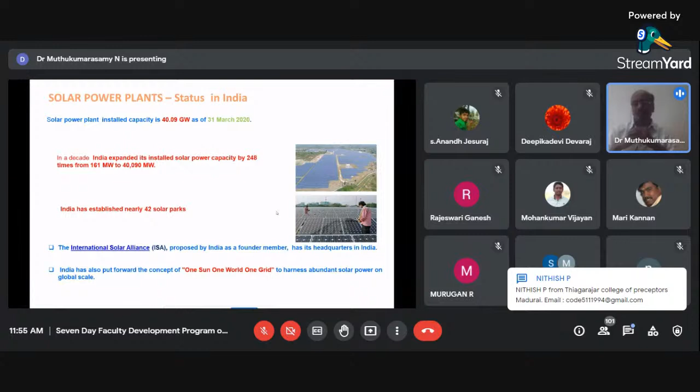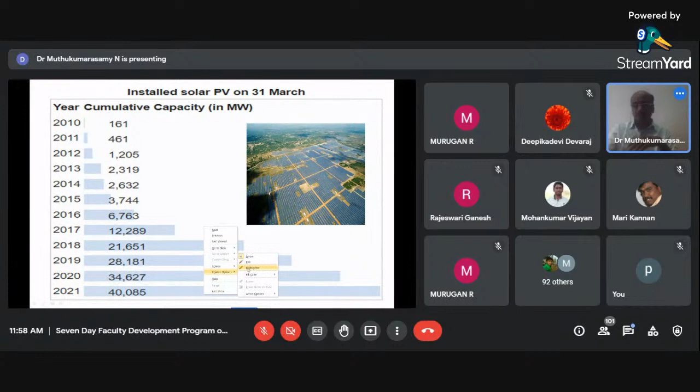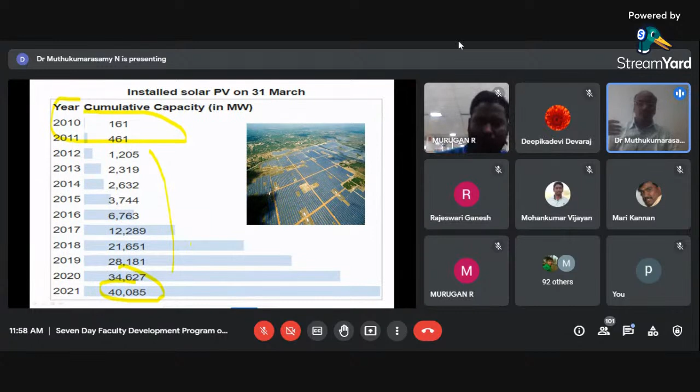And installed solar PV capacity as of 31st March 2021, as I told, is 40,085 megawatt, which means 40 gigawatt. You can see we started in the year 2010. 10 years back, it was only 161 megawatt. Now you can see how much we have improved, and the rate at which it has increased. So now we are standing at 40,085 megawatt, as on 31st March 2021.

After that, many industry people started to enter into solar utilization. They went for massive purchase of lands and laying of solar panels. And many industries have 3 megawatt, 4 megawatt, 10 megawatt solar power plants installed all over Tamil Nadu. So that's why we are in the third or fourth position, because Gujarat as well as Telangana are very closely following us. As of March 2021, Tamil Nadu is producing 4.4 gigawatt of solar power.

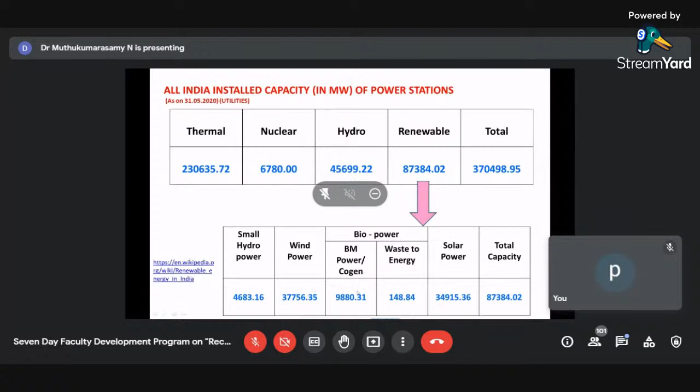Now it is 40 gigawatt. That is our solar power. And you can see small hydro means less than 100 megawatt. Then you have wind power, 37. Then cogen means cogeneration, where they are using it for heat as well as light, 9880, all those things.

Okay. Now, what is the target which India has set? I told you that India has set a target that they want to reach 20 gigawatt in 2022, but they achieved the target 4 years ahead of the schedule, and in 2018 itself they reached 20 gigawatt. Now they have fixed a target of 100 gigawatt by 2022, but it is a highly ambitious target. We do not know whether we'll be able to reach 100 gigawatt in 2022.

Because now we are in 2021, and as per this target, we should have reached 82, but we are halfway only, we have reached only 40 gigawatt. So maybe we may reach 60 gigawatt or 70 gigawatt by the year 2022. But anyway, they have gone for a highly ambitious target. They want to go for 100 gigawatt as of 2022.

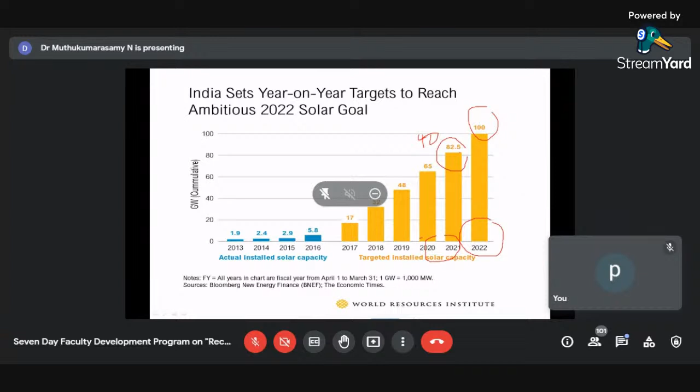So you can see the cost of solar power has come down drastically from 17 rupees per unit in the year 2010 to 2.44 rupees in the year 2017-18, and this has made more people move towards solar panels. They have started to install solar panels in their home, in their industry, and they have started to utilize the electricity which they get from solar panels. So this was a misconception which was there earlier. Now this also has been broken, and now the cost which you have to spend has become very, very less.

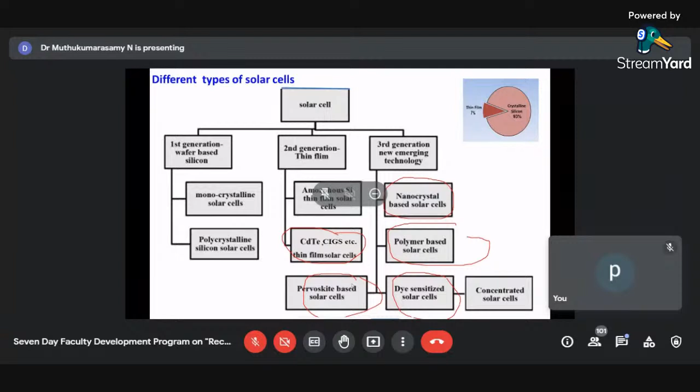So we are going to see perovskite based solar cells, which are emerging technologies in the category called third generation solar cells. Why are many people working on them? Any person working in solar materials research will try to work with perovskite solar cells. You can see here the perovskite solar cell. It started only after 2013. During that time the stability and efficiency were very low, only nearly 10%, 11%, 12%.

Now this is in 2020. They have reached more than 25% efficiency, an efficiency comparable to that of silicon solar cells. So within a short span of time, from 2013 to 2020, they have reached this efficiency.

But take the crystalline silicon solar cell: it started in the 1970s, and only after 1995 or so did it reach this efficiency. It took more than 25 years to come to an efficiency of 20%. Whereas perovskite solar cells, within 7 to 8 years, were able to give an efficiency comparable to silicon solar cells. That is the main advantage of perovskite solar cells, and that's why people have started to move towards them.

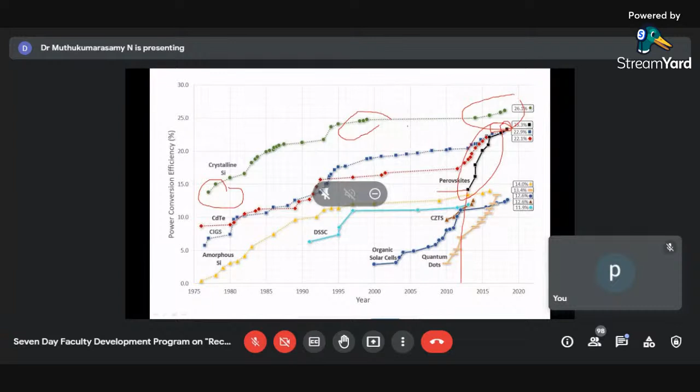Another important thing: that is lab scale efficiency, not commercial efficiency. Please keep it in mind. And another thing is, it has not been tested under all conditions as tested for silicon solar cells. Silicon solar cells have been tested under all conditions, under different temperature gradients, different irradiation gradients. But perovskite solar cells and other new entries have not been tested under all conditions.

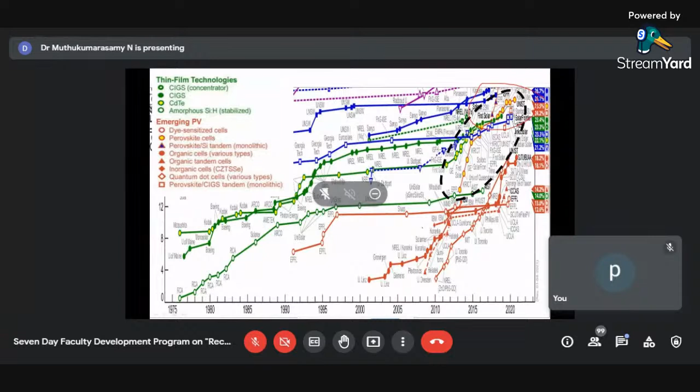So this is nothing but a magnified version. You can see it has come to a level of 25, which is comparable to the efficiency exhibited by silicon solar cells. So it has come to this particular level. That's why people have started to move towards perovskite solar cells. And you can see how the efficiency has increased from 2009. It was only 3.8%.

Efficiency is nothing but the solar power which you give and the amount of electricity which you get. Amount of electricity produced divided by the solar input. How much solar has been converted to electricity? That is what we call efficiency. In 2009, it was only 3.8%. By 2016 it had crossed 22%. Now it is 25.5% in 2020.

And the number of research publications, because many people started to work with perovskite solar cells. Per year, you can see in 2014 nobody was working with perovskite solar cells. Some people were interested in crystal growth of perovskite. But after 2017, the number of research publications per year on ordinary perovskite solar cells, this blue color, is more than 2,000. And in 2019 it was at maximum, nearly 4,000 publications per year.

All these are Scopus indexed publications. Please keep it in mind. They are not ordinary publications. More than 3,000 publications are coming out per year, particularly in perovskite solar cells. And you have two-dimensional and three-dimensional perovskite solar cells.

Another important thing I want to tell you: if somebody is interested in working with perovskite material, if you can grow large perovskite single crystals, you can also use them for another application, particularly X-ray and gamma ray radiation detection. They are very good detecting materials, particularly for X-rays as well as gamma rays. So there also they have started to use perovskite materials.

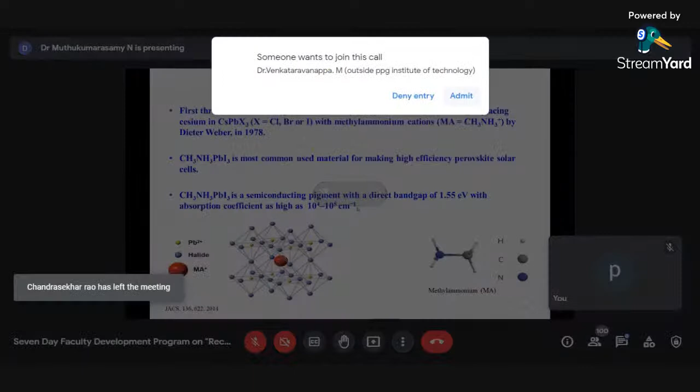You can see that in the diagram on the left hand side, with lead occupying the center, and in the center diagram, the octahedra formed by the halide ions. Initially people were working only with cesium lead iodide and cesium lead chloride. Then they went for an organic-inorganic hybrid perovskite, introduced by Dieter Weber in 1978, where cesium was replaced by methyl ammonium. So it was methyl ammonium lead iodide or lead chloride.

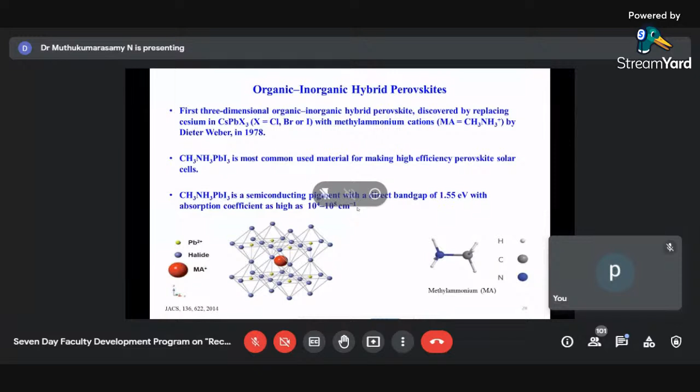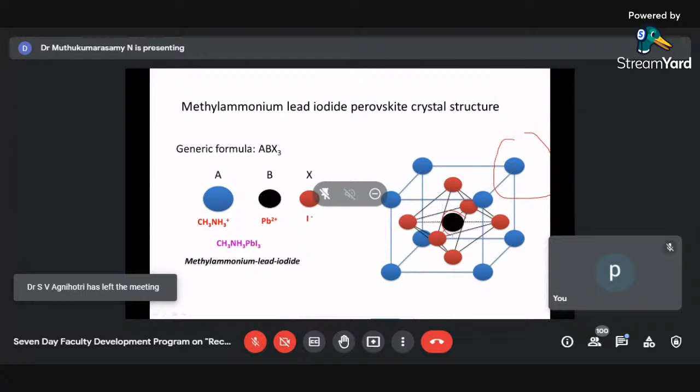Methyl ammonium lead iodide is the most suitable material for the fabrication of solar cells. In this type of solar cell, it is used as an absorber material, which absorbs the incident solar radiation and converts it into electricity. It has a band gap of 1.55 and an absorption coefficient as high as 10^4 to 10^5 cm^-1. As I told you earlier, in the methyl ammonium lead iodide perovskite, methyl ammonium ions occupy the corner positions, the chloride or iodide halogen ions occupy the face centers, and lead occupies the body center position.

And another important thing is there is also what you call by the name phase change, where you know that you must have studied the crystal structure, where transition from one to another can happen, and also your corner atoms may be moving, because all these things depend upon how you're going to construct your crystal structure or unit cell.

And another important thing is this methylammonium lead iodide exhibits 3 different crystal structures. Greater than 327.4 Kelvin, it will be cubic. In the temperature range 162 to 327.4, that is in the room temperature range, it will be tetragonal, where we are using it as a solar cell material. And if you go for a temperature less than 160, it will go for an orthorhombic type of structure. So it exhibits 3 different structures: cubic above 327, tetragonal in the range of 162 to 327, and below 160 orthorhombic.

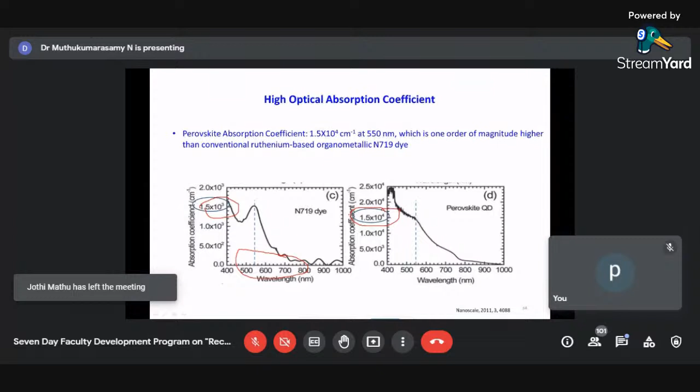Now coming to the main area, if people are interested in working with perovskite materials, then you could start working with methyl ammonium lead iodide. That was the material which we started to work on nearly 6-7 years back. So methyl ammonium lead X3, we can have iodide or chloride or whatever it be. You can change the band gap, because band gap tuning will make your material absorb light as per the wavelength. So you can extend the wavelength of light which you want to absorb by tuning the band gap.

People who are working with solar cell materials know that if you have a band gap in the region of 1.4, 1.5 electron volt, particularly the one that matches with cadmium telluride and copper indium gallium selenide, that is considered to be a very good solar cell material because it will absorb the entire visible wavelength region. But silicon solar cell has that particular drawback because its band gap is only 1.1, and again it is an indirect band gap material.

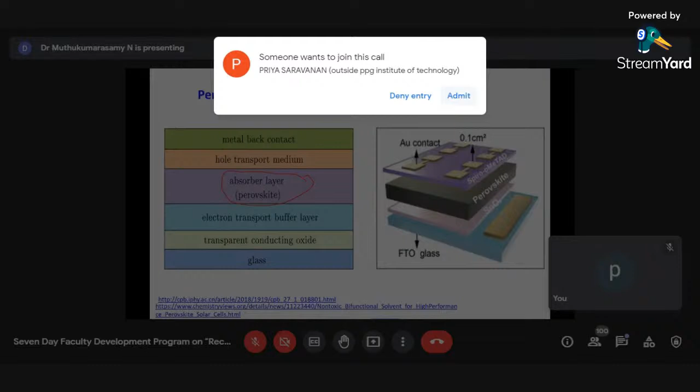So as I told you, the perovskite solar cell architecture is completely different from your silicon solar cell architecture. You have different layers in your perovskite solar cell, and the main layer is your absorber layer, which is made up of a perovskite material, which is going to absorb your sunlight. As soon as it absorbs the sunlight, it is going to produce electrons and holes. So holes will be scavenged or attracted into your hole transporting material, and electrons will be moved into your electron transporting material.

So electron hole pairs have to be generated, what you call by the name exciton, where you have your electron in the conduction band and hole in the valence band. The hole moves into the hole transporting material and the electron moves into the electron transporting material. Then that electron has to enter into the transparent conducting oxide, and generally they go for fluorine doped tin oxide. So fluorine doped tin oxide coated glass plates are used as substrates, and over that you have your electron transport material, and the most commonly used electron transport material is titanium dioxide.

Then for the hole transport material, generally they were using organic materials, which I'm going to tell you about later, or they go for nickel oxide, and now people have started to work with carbon based materials as hole transporting material, and the last one will be your metal contact.

So the structure is not a simple structure. You have to grow different layers. That is very, very important. So you can see the right hand side diagram, which shows how a perovskite solar cell will look like. For clarity's sake, I have shown the layers well separated, but those layers will be lying one above the other, having a very good contact with one another.

So you have an FTO glass. Either people can go for ITO glass or FTO glass, but people who are working with dye-sensitized solar cells or perovskite solar cells better start with FTO glass, that is fluorine doped tin oxide glass, because with ITO glass, when you anneal it to temperatures of 300, 400, etc., stability issues will be there. So better to stick to fluorine doped tin oxide glasses.

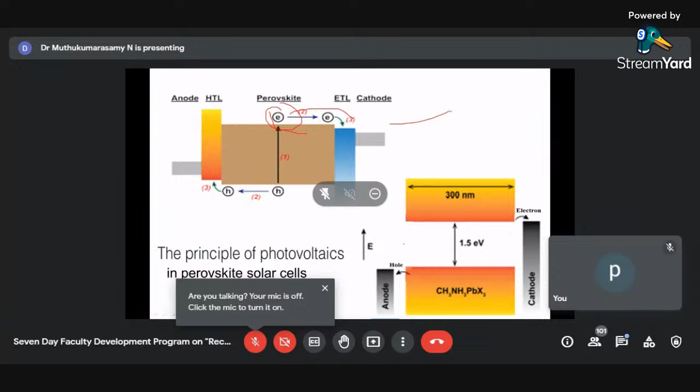But what is the reason that the efficiency is less? You have many energy losses which take place. That is, the electron which is being excited into the conduction band of the perovskite material has to move into the conduction band of TiO2. If that doesn't happen, if that electron, for example, reverts back to the valence band, then that is a loss. Or if that electron, after moving to the conduction band of titanium dioxide, comes back into the valence band of your methylammonium iodide or comes back into the spiro, then that again is a loss. That electron after TiO2 has to move to the other counter electrode.

If that doesn't happen, then that will be a loss. Or if an electron from the conduction band returns back to the spiro. So all these are energy losses. The electron which is being excited and put into the conduction band of your perovskite material should enter into titanium dioxide, then to the counter electrode. It should not come back. If that happens, then those are the things which are responsible for the energy losses which take place in perovskite solar cells.

Now coming to the evolution of perovskite solar cells, how all these things started, you can see perovskite solar cells started only from dye-sensitized solar cells. People who are working with dye-sensitized solar cells know that in dye-sensitized solar cells, you will be having a photoelectrode. It may be titanium dioxide or zinc oxide, particularly titanium dioxide. And this titanium dioxide is soaked with a dye material, particularly a material which can absorb your visible light, particularly ruthenium-based material. So titanium dioxide is sensitized by using ruthenium, and that forms your one electrode.

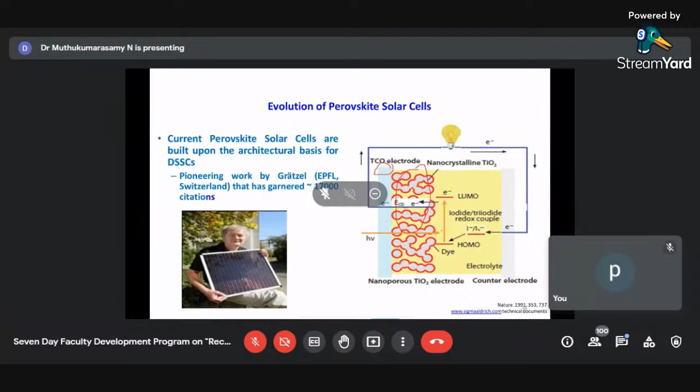And the electron which the dye has lost comes from the electrolyte here, and it may be a polysulfide electrolyte or iodide, triiodide type of redox electrolyte. And from there you have the electron coming here, and the process continues, and you have electricity being produced. Electron starts to move through the external electrodes. So dye-sensitized solar cell was started by Gratzel, and people started to work with dye-sensitized solar cells, and they have reached an efficiency of 11%, 12% as of now. So this was the starting point for your perovskite solar cell.

Now this dye in the dye-sensitized solar cell was replaced by a perovskite material by Miyasaka in 2009, and he was able to produce an efficiency of 3.8%. What Miyasaka did was he introduced perovskite with your titanium dioxide. He mixed perovskite material with titanium dioxide, didn't use any dye, and fabricated a solar cell and obtained efficiency of 3.8%. But one important thing he was able to understand was that particular solar cell didn't last long. Only for a few minutes he got an efficiency of 3.8%.

After that, the liquid electrolyte completely ate away the perovskite material. The entire perovskite was dissolved in the liquid electrolyte within a few minutes, and the efficiency dropped down to 0. So the lithium iodide electrolyte which he used, and methoxyacetonitrile, all those things completely ate away the perovskite material. So the cell had a lifetime of only a few minutes.

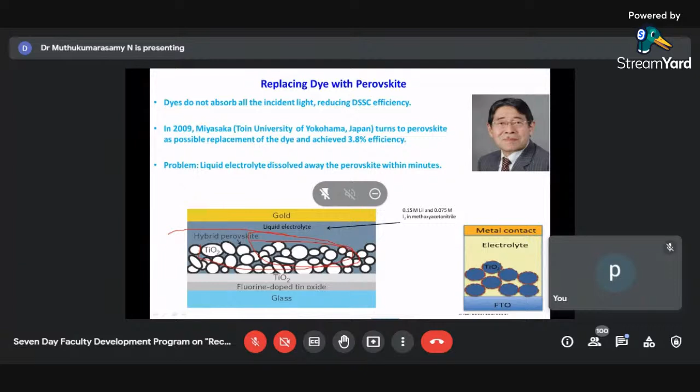So what Grätzel, who started this dye-sensitized solar cell, did was great: he used a hole transporting material which was a solid type of hole transporting material. That liquid electrolyte was replaced by a solid hole transporting material, and the material which he used was Spiro. Spiro, if somebody is interested, is spirobifluorene. It is tetrakis methoxyphenyl amino

spirobifluorene. People who are working in chemistry may know this organic type of material better, and he used that and got an efficiency of 9%. So this was the first perovskite type of solar cell, where the titanium dioxide material was mixed with perovskite and used as a light absorbing material, and the liquid electrolyte was replaced by a solid organic hole transporting material, Spiro. They got an efficiency of 9%, but there were stability issues associated with it.

Okay. So how is the device structure of a perovskite solar cell today? There are actually two types, mesoscopic and planar, but people are not working with the mesoscopic structure now; they are working only with the planar type of structure. So you have your bottom electrode, which will be fluorine doped tin oxide. Over that you will have titanium dioxide, then a titanium dioxide plus perovskite mixture, then hole transporting material, then gold.

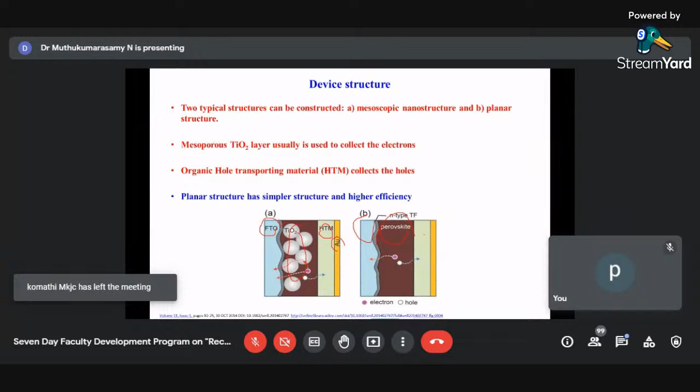Then over that you have your hole transporting layer, which may be spiro or nickel oxide or other type materials also. So, construction of the perovskite based devices. An electron transporting layer will be there, which will immediately be absorbing the electrons and transporting the electrons.

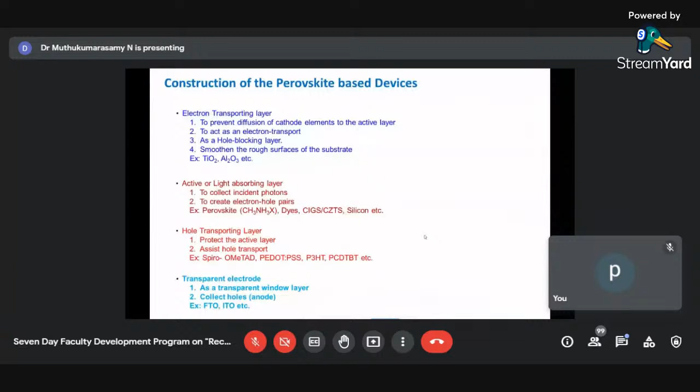Then the transparent electrode, the window layer, may be your FTO or ITO. So the layer construction is a bit complicated, but it's not that complicated if you have very good hands-on experience working with it. Initially you'll have some issues, but after that you yourself will develop the skill of coating one layer over the other.

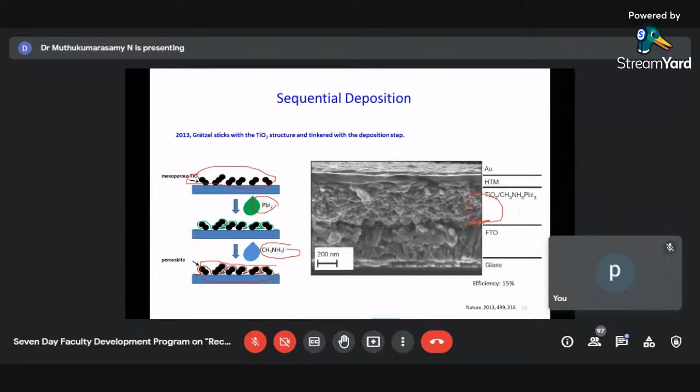And you can see the real magnified image, the same cross section. So glass, up to this you have your FTO. Then here you have your titanium dioxide and methylammonium lead iodide, and over that is your hole transporting material, then your gold contact layer.

So if somebody is interested in preparing perovskite solar cells, initially you will be having some problem, because this perovskite material is hygroscopic in nature. It will easily absorb moisture and start to degrade. So initially when we started to work in 2013-14, we had those issues. We were working only inside a glove box.

But now our students have acquired that skill, and under normal conditions in a normal laboratory without using any glove box, they are able to prepare methylammonium lead iodide based perovskite solar cells. So it's only the trial and error method which you have to follow, and you have to acquire those laboratory skills. Then you can synthesize methylammonium lead iodide without using a glove box itself.

Okay. So you have to take a fluorine-doped tin oxide substrate. You can purchase it, and over that you can coat titanium dioxide. If you have a spin coater, you can coat using it, maybe 100 nanometer or so. You can adjust the speed and the viscosity as per the requirement, so you have the titanium dioxide layer.

Over that, by spin coating, you can coat your perovskite layer, methylammonium lead iodide in the form of a solution or sol gel. Then over that you can have a thin layer of spiro coated. Then you can go for your electrode deposition, and you get a perovskite type of solar cell.

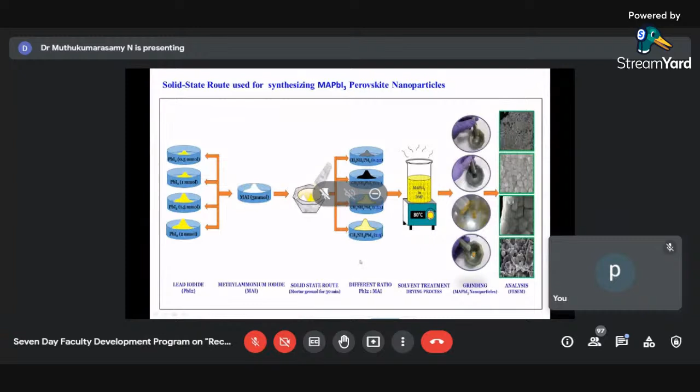Now, first we prepared methylammonium lead iodide. You can see the process. We mixed it by using a grinder type of arrangement. So one thing I want to tell you is, when we changed the amount of lead iodide, we were able to see either an excess of lead iodide or an excess of methylammonium iodide. So we were able to optimize, and for the 1:3 lead iodide to methylammonium iodide combination, we got only perovskite.

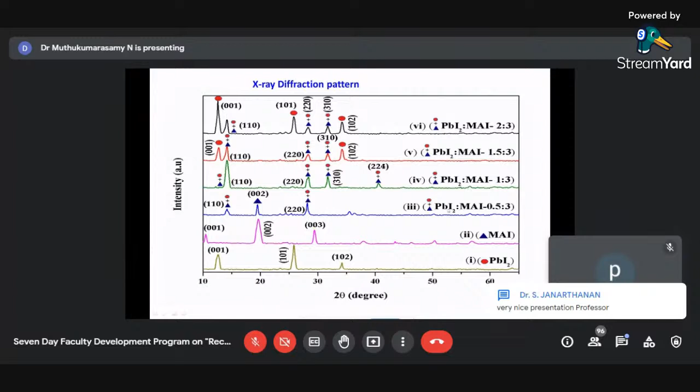You can see here only the peaks corresponding to the perovskite methylammonium lead iodide. When it was less, the lead iodide peak was also there. You can see the methylammonium iodide 002 peak being present. When we go for excess, you can see the other one dominating. So excess of lead iodide, other one dominating; less lead iodide, methylammonium dominating. So 1:3 means we got stoichiometric methylammonium lead iodide.

Then we did the other characterization studies, and when we had 1:3, the optical window goes up to 800 nanometer; the absorption of visible light is very, very good. This one had a band gap of 1.51 electron volt. Lead iodide, this red one, is the absorption spectra. It absorbs light only up to about 450, band gap 2.3. And methylammonium iodide absorption is not very good, less than 0.4, and it has a band gap of 3.5 electron volt.

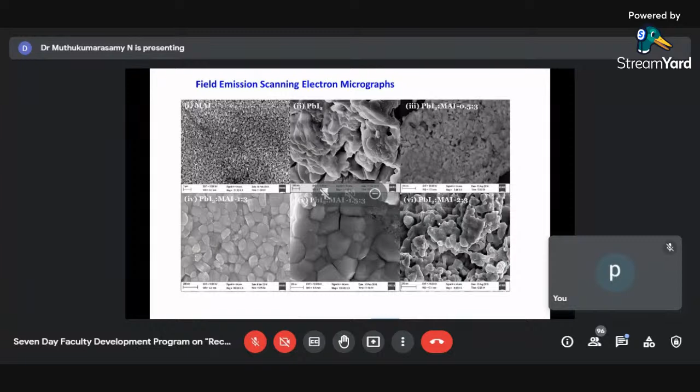But when we mixed methylammonium iodide and lead iodide at 1:3, you can see the window extending up to 800 nanometer, covering the entire visible region. So it will be able to absorb all the visible radiation. And these are some of the field emission scanning electron microscope images. I'm not going to spend much time on these, because many of you may be aware of them. For a particular percentage of lead iodide, we get uniform distribution of our crystallites, and these are HRTEM images, particle size.

And this is an interesting thing which we did, and this got published in Nature Scientific Reports. We used carbon as a hole transporting material, and we did away with the counter electrode. Here we used a single material which acted as a hole transporting material and also as a counter electrode. So that was the main thing.

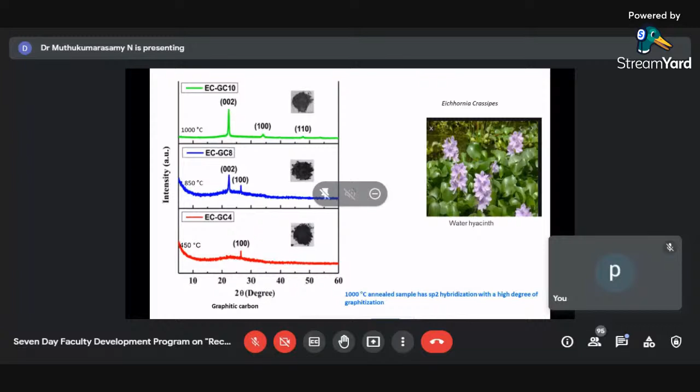We collected the leaves of this water hyacinth plant, cut them to small pieces, dried them, then burnt them, then annealed the burnt material at different temperatures, and at a calcination temperature of 1000 degrees centigrade we got graphitization and very good carbon, a carbon with a high degree of graphitization, and we used it as a hole transporting material in our fabricated solar cell.

We also mixed it with the perovskite material and used it for solar cell fabrication. These are some of the images corresponding to that material. We fabricated a solar cell where this carbon layer was used as a hole transporting material, and we used the brush painting method to deposit that layer. And we got an efficiency of 8.53%.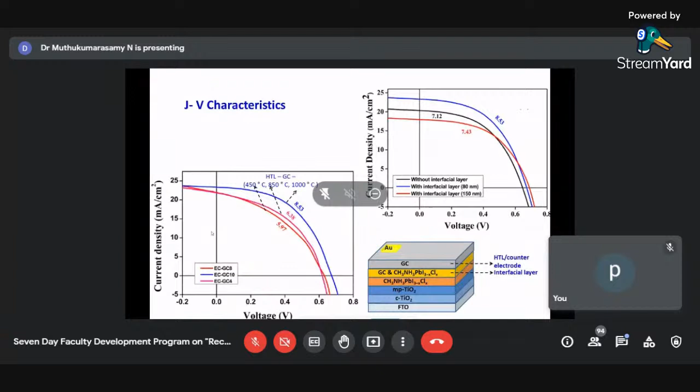For the carbon annealed at 1000 degrees centigrade, because it was highly graphitized, we got a very good efficiency of 8.53%. This was published in Nature Scientific Reports. You can see the solar cells we fabricated and the methodology used. The solar cell fabricated using commercial carbon gave only 6.36%, but for the one using carbon obtained from this invasive plant species, it was

8.53%. The main problem was the low open circuit voltage, and the fill factor was only 54%. We also studied the stability, and over 1000 hours, from 8.52 there was only a slight reduction, down to 8.05%, for the solar cell fabricated using the carbon obtained from that plant species.

We made the stability measurement for 1000 hours, nearly 42 days, and even more than that, for nearly 60 days and 90 days, and there was only a slight reduction in the efficiency. These are all the stability measurements we have done.

This is another interesting paper which we published in the Royal Society of Chemistry, the RSC journal; we have many papers published there. Here we used zinc oxide which we prepared. We didn't prepare it directly from this plant species; we used the plant as a catalyst, or a surfactant, and it controlled the crystallite size of the zinc oxide

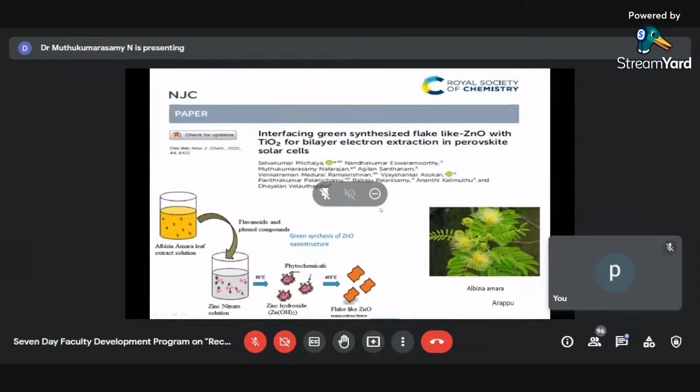We fabricated a solar cell with glass, FTO, compact TiO2, then zinc oxide instead of ordinary TiO2 as the electron transport layer, then mixed perovskite material, then spiro, then gold. We got an efficiency of nearly 7.83, but a very good short circuit current.

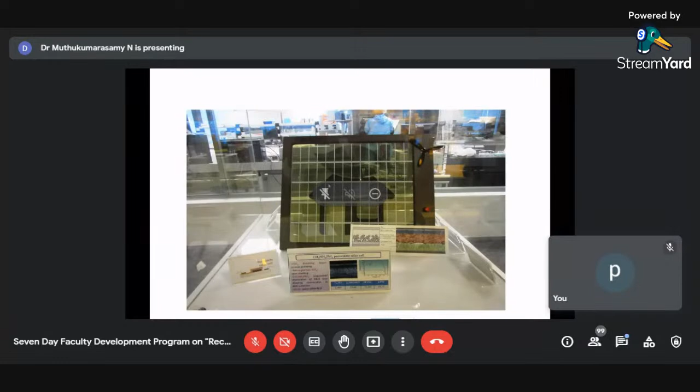So this is a perovskite solar cell which is there at the Nanyang Technological University in Singapore, and there everything is being done in an instant manner, and they're able to prepare the solar cell. This is in working condition, and under the indoor condition itself, this showed an efficiency of nearly 18% or 19%, and this was, I think, in 2016 or so.

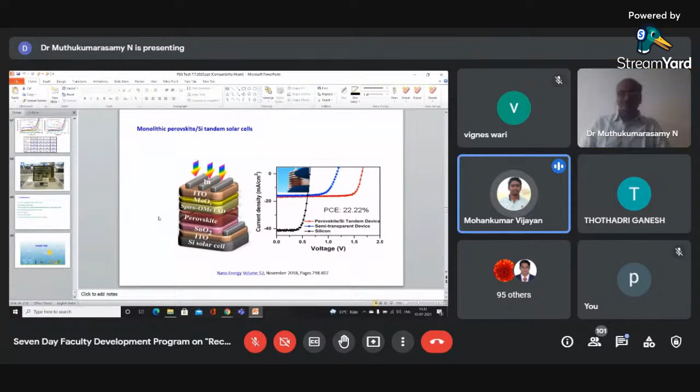Sir, another question from participants. Please explain the effect of mixing two or more cations at the A site, where I have seen triple cation perovskite solar cells in the literature and protocols. Yes, all those things are there. As I told you, you will be having mixed halide perovskites. You have 2D type, 3D type perovskite solar cells. All those things are available. Wait a minute. I will go to that particular slide.

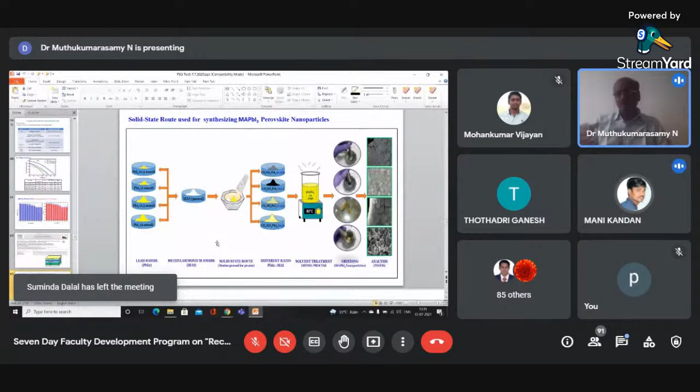And so we have mentioned how you can easily prepare methylammonium lead iodide by a wet chemical method. You take your lead iodide, then methylammonium, as per stoichiometry.

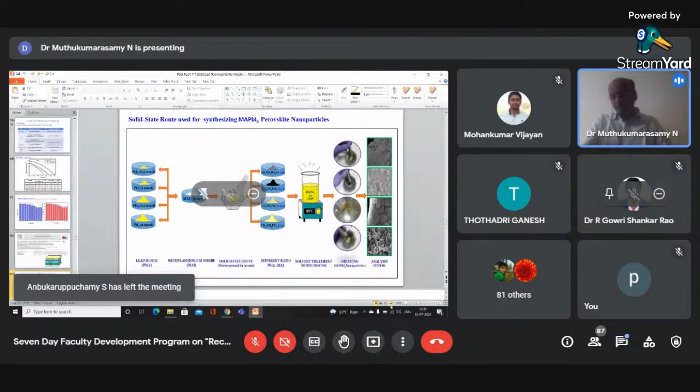You can see here we have taken methylammonium iodide and lead iodide. This has been done only by a wet chemical method, with ethanol and your solvents. You mix them. You can go through the paper; this has been published, and we have given in detail how this has been prepared. You take stoichiometric amounts of methylammonium iodide and lead iodide, then mix them, and you'll get a very good perovskite material. But initially you will have some issues, because after you coat, the color change will happen immediately, which means it has started to degrade.

Surface passivation is very, very important. Surface engineering, so you have to give much importance to the surface. So you can easily prepare methylammonium lead iodide by wet chemical method. It's not an issue at all.

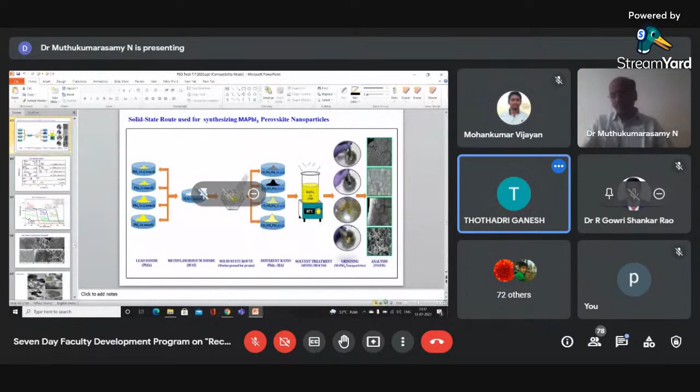Actually, I was also in South Korea from 2007 until 2016, at Hanyang University. I was also working in solar cells. So it's nice to see your work, sir.

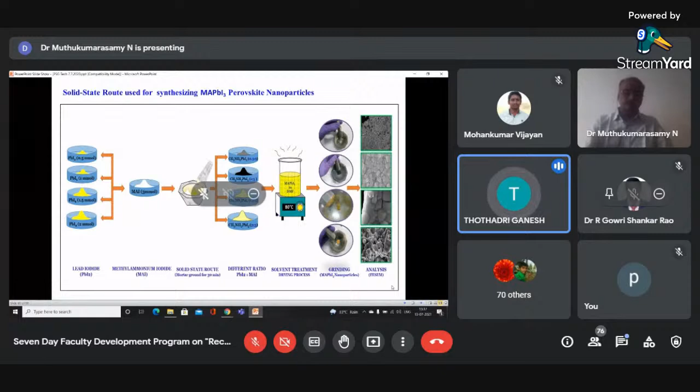And one more thing, I'm not sure, but in your optical absorption of lead iodide and MAI at 1.5:3, it seems to show high absorption, but why is it not showing good efficiency, sir?

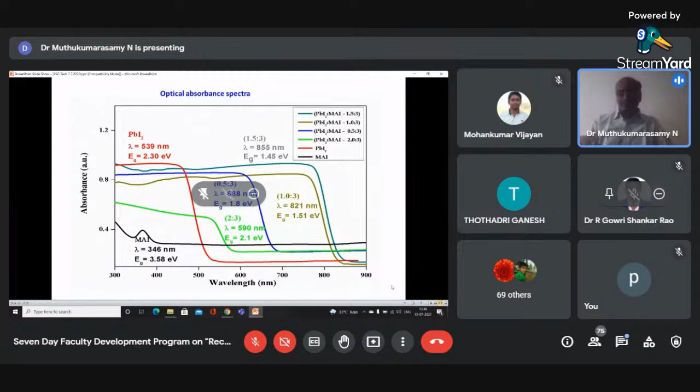I don't understand. Even it is showing 1.45 band gap. Yes. Actually, the efficiency which we got here was very less, because the methodology which we followed was a facile powder press technique. This was the first time: over the ETL layer, we spread the perovskite layer and applied a pressure, and that is what you call compacting. It was a compacting type.

We spread the perovskite layer material over your ETL layer, applied a pressure, and over that we coated a HTL layer, and then we fabricated the solar cell. When we were studying the surface engineering, we were able to see that these powders which we spread over the ETL layer did not have good connectivity between the two, because it's only spread, and there were so many areas where there was no connectivity at all.

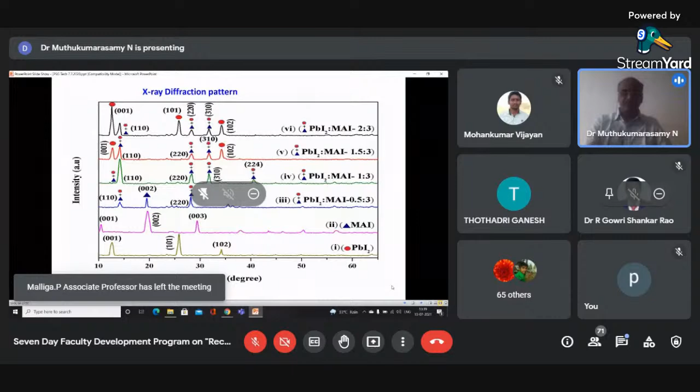That was the main thing. So in that particular scheme, I think the interfacial contact is not good. That's why it might be less efficient. We did the same thing with the solution growth technique. We got nearly 8% efficiency. Same material, solution growth, nearly 8% efficiency. The one we have reported here is, I think, 7% efficiency. We got nearly 7% efficiency, because that was the first time we tried this powder press technique.

That's why we have mentioned here that we generally did powder pressing, and you might have done some heat treatment process also for better interfacial contact. That was the problem.

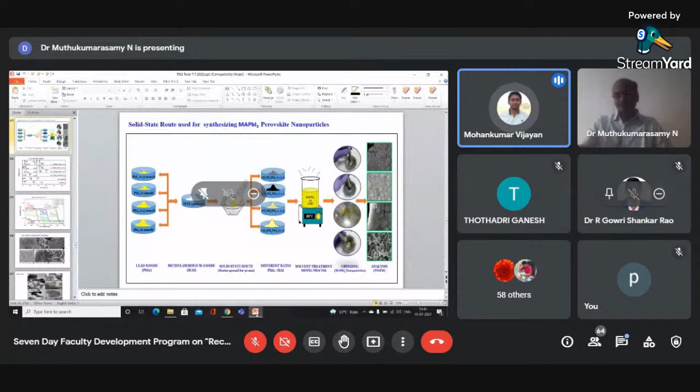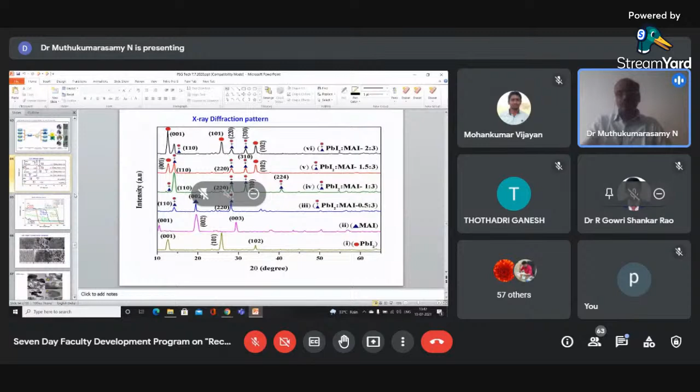Yes. What is the use and benefit of PIN or NIP based? How will we decide whether a perovskite material is N-type or P-type? See, the main function of the perovskite material here is it has to absorb your light, and it has to produce electron hole pairs. That is the main function. It is used as an absorber layer as far as the perovskite solar cell is concerned.

So here you can see N or P, depending upon your majority carriers or minority carriers, you're going to brand them as N material or P material. But here, as far as the function of perovskite is concerned, it is used simply as an absorbing material, which is going to absorb your light and produce your electron hole pairs. And the electrons are transferred to your electron transporting layer, and holes are transported into your hole transporting layer.

So you have to go for an appropriate hole transporting material. You have to choose an appropriate electron transporting material so that the electrons and holes which are being generated after the absorbance of light enter into their respective layers and move towards the other layers. Okay. So perovskite material, we generally don't take it as N-type or P-type. That's why you can see this structure.

It's called by the name NIP structure. I stands for intrinsic, which is your perovskite, N is your electron transport material, and P is your hole transporting material. Okay. So if you allow light from the electron transporting material, you call it the NIP structure. If you allow the light to fall on your hole transporting material, you call it the PIN structure.

That's all. So the main purpose of perovskite material is it is used as an absorbing material or a photoelectrode which absorbs light and produces electron hole pairs. And those electrons and holes are separated and pushed into the respective electrodes. So to make them move into the respective electrodes, on both sides of a perovskite material, you are coating